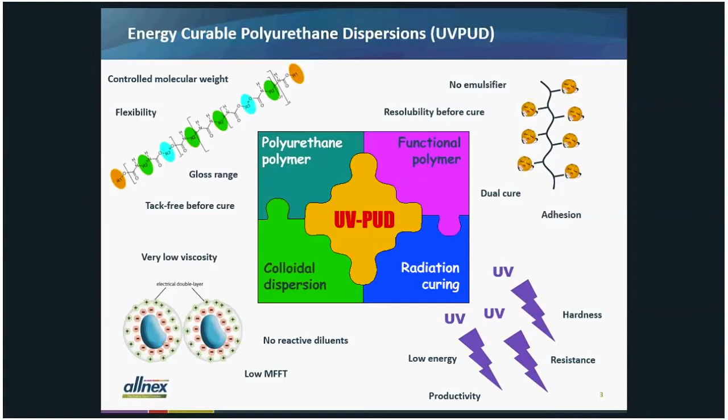And finally, fourth, they are also functionalized polymers that present excellent colloidal stability without the use of any emulsifiers. Their functionality usually stands for good adhesion on wood, but also eventually on plastics, while they can be used for 1K or 2K dual cure if required by the application. Due to their amphiphilic nature, they can be made resoluble in water before cure.

It is possible to integrate these features in a straightforward sustainability model inspired by life cycle analysis. The model has three distinctive axes, as visible on the slide here. For the composition, products can be made from safe or renewable raw materials and typically have a low volatile organic content, as already discussed. In a second perspective, we need to consider the performance in use. The products have a low film formation temperature, and therefore they do not need the use of extra co-solvents, which are often referred to as coalescing agents, in order to make a good film. It is reducing dramatically the volatile organic content of the formulation.

Also, the product can be resoluble in water before cure, meaning that the dried coating can be easily cleaned without the use of solvents. The trend for high solid contents also minimizes the drying energy, and the use of highly reactive products and formulations allows the use of low energy cure, for instance using LED lamps.

The third and last dimension is lifetime and disposal. Most products offer high durability, or even weatherability in the case of outdoor exposure. And an increasing attention is also provided to the recyclable character of the raw materials and the final products, as well as their biodegradability. That brings us to the front end of innovation.

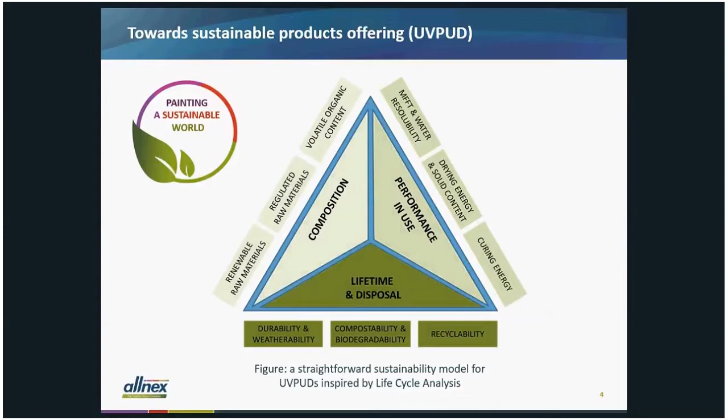Indeed, and all this leads to an interesting portfolio of products for different applications. So I'm looking to the middle of the slide. Different applications, different cycles, different coats, primers, top coats, but also self-sealing systems. Also different levels of performance. Can be high performance, but can also be value in use, like we say, fit for use, meaning that products do the job without over-engineering.

Can also be clear applications, white, colored. We know that for colored systems you need a much higher hardness. Can be indoor as well as outdoor. Most of the products will be oriented to industrial applications, but we also have some specific developments and products for what we call field applied applications. And then last but not least, gloss is very important. So we have specific developments and products for high gloss applications as well as for matte.

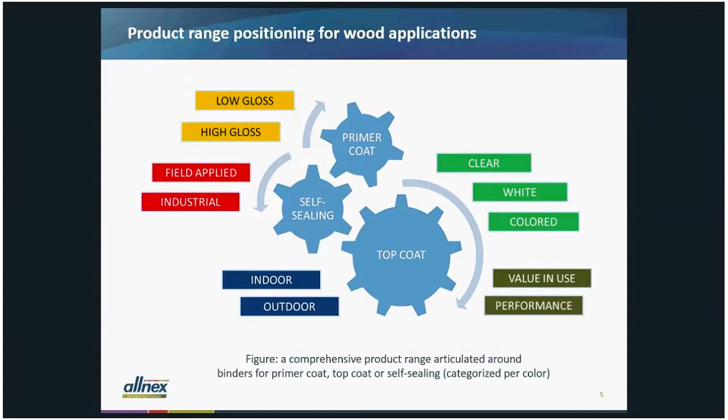Okay, and 4 new products were recently developed for these wood applications. When you look at the slide, you can see that they are each characterized by an innovative step, which is always linked to the particle: its morphology, its stabilization, its functionalization, or its composition. We are entering here in a fascinating world, the world of nanoscale particles.

When you imagine monomodal particle dispersion at 40% solid content, which is often the case, you have to realize that the distance between the particles is only about 20% of their diameter. Yes, they are really so close to each other, and at the same time, they are stable, even in more extreme conditions of storage. It's indeed very, very surprising.

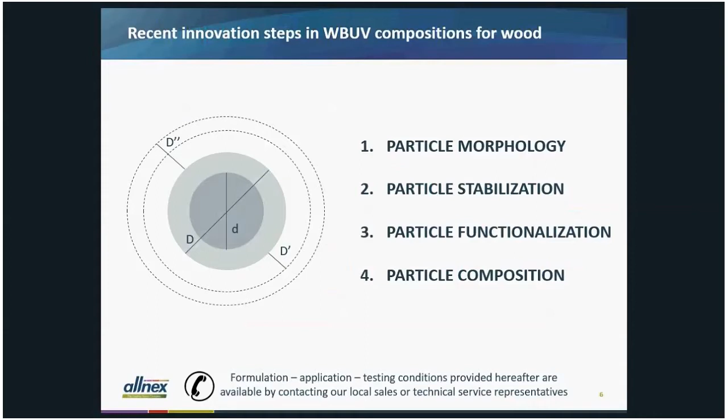And did you know that 1 gram of particles having all a diameter of 100 nanometers, which is a standard for these kinds of products, well, this 1 gram will develop a surface of about 100 square meters. The nanoworld is really full of surprises. So let's go immediately to our new products now.

First, we are going to look at the particle morphology, introducing swollen polyurethanes. Products with hard-coat properties after cure were developed as small molecules with a very high acrylate functional density, and since they were viscous liquids, they found their existence in water as an emulsion. That is the situation that you see on the left of the slide here.

These products can have a very high solid content, up to 65%, associated to a big droplet size, up to 1 micron. But we were able to develop recently a new dispersion, keeping the same features. The product is made from highly functional acrylate polyurethane particles, having thus a higher molecular weight, as you can see on the slide, but that could be swollen by the compounds of the previous emulsion. And that is the situation that you see on the right side of the slide.

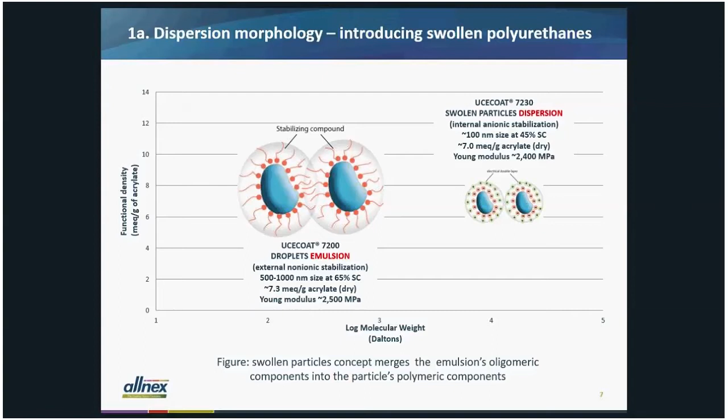The particles can thus be seen as a kind of reservoir for highly functional molecules, but the new products keep all the attributes of a polymer dispersion in water. So, what does the product look like? Well, when we first look to the wet dispersion properties on the left, we see that UCECOAT 7230 has a high solid content of 45%. High because the standard in waterborne UV is 35 to 40% in solids. The pH is above 7, which is also standard, of course.

The MFT, so the minimum film formation temperature, is below 5, which is very low, which is important as it does not require addition of co-solvents, so no extra impact on VOC. And UCECOAT 7230 is also tin-free, like all our new developments already since a couple of years.

Now, coming to the coating properties on the right side, all the value of UCECOAT 7230 is related to its extremely high concentration of acrylate functions, making this resin very effective as a modifier resin for improving hardness, scratch resistance, and stain resistance.

So, it's a bit similar to 100% UV formulation, where, for instance, a 6-functional urethane acrylate is commonly used to improve the final properties. Here, in waterborne UV, we recommend UCECOAT 7230 as a performance booster in the same way.

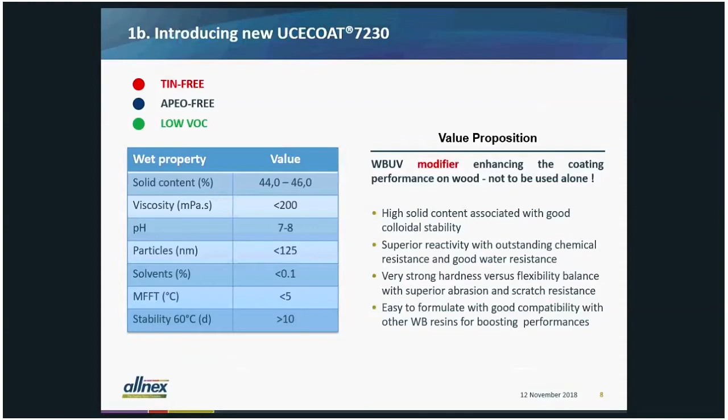On the next slide, we have an example, and it's a very extreme example, since here we blended UCECOAT 7230 with Resydrol 6191, a conventional alkyd emulsion that does not contain any reactive acrylate functions on itself. So all the UV cross-linking is coming from the 7230.

And it's an interesting example since it also shows a way to introduce renewable content in waterborne UV dispersions. So in this case, here it's a 60-40 blend. We obtain a renewable content of nearly 20%.

And on the left, you see the profiles. The yellow spots on the graph indicate which properties remain unaffected by the blending. You see the stability, the aspect, the gloss, the chemical resistance. And of course, there is also some impact on hardness and stain resistance. But this is very decent considering that we blend here with 40% of an alkyd emulsion. So all this would not be possible without the extremely high double bond concentration of the 7230.

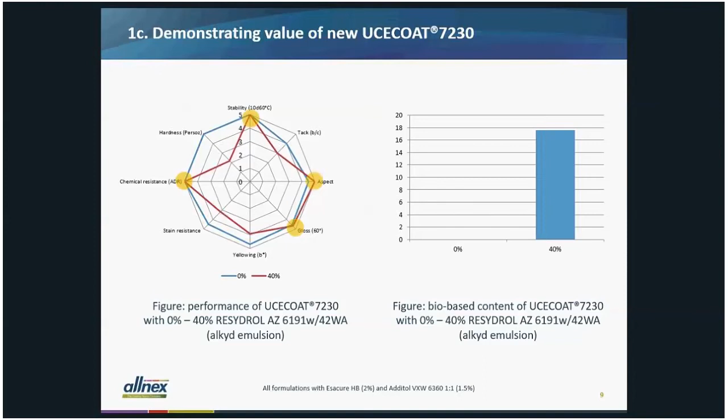And now we are going to look at the particle stabilization this time, introducing nonionic polyurethanes. The stability of polymer dispersion is usually obtained from the electrostatic repulsion between negatively charged particles.

Sure. On the wet properties first, there are two special characteristics to mention. First, it's a label-free dispersion. And second, and this can be associated to the non-ionic stabilization as explained by Michel, the resin shows a very good pH stability during aging. And therefore we expect for the UCECOAT 7738 a lot of robustness and stability in the formulation.

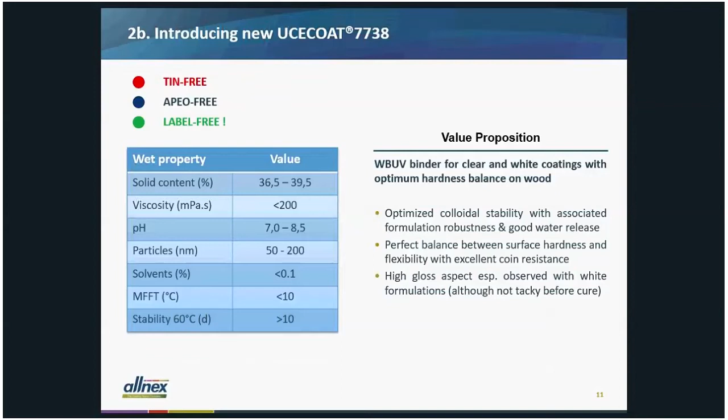And with physically drying resins, we know that it's much more difficult to obtain this mirror effect. But of course, it's a big advantage to be physically drying because it means less dust take-up, so less risk for defects in your high gloss coating.

An interesting note is also that both dispersions can be blended in high gloss applications. We got quite interesting results with an 80-20 blend. So 80 for 7738, 20 for 7788.

Okay, and now we are going to look at the particle composition and introduce functional polyurethanes. Please have a look at the left of the slide. In fact, yellowing on cure, whether with UV light or electron beam, may occur during product application and typically disappears after a few hours. It can, however, cause some difficulties for online color matching in specific industrial lines.

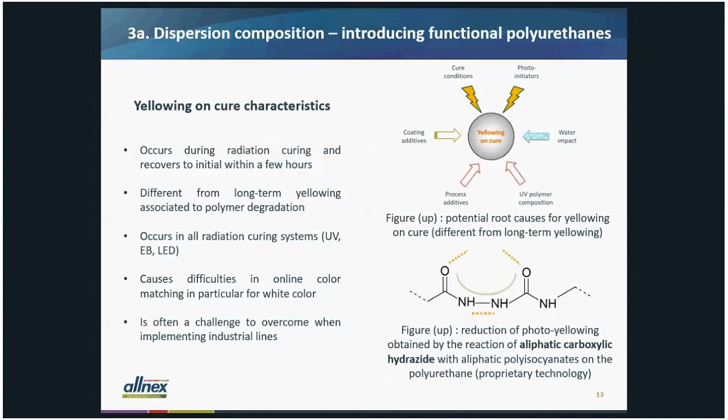Well, in practice, we confirmed the lower yellowing upon cure of the 7510. It can be a real advantage in those applications and productions where the color matching is done immediately.

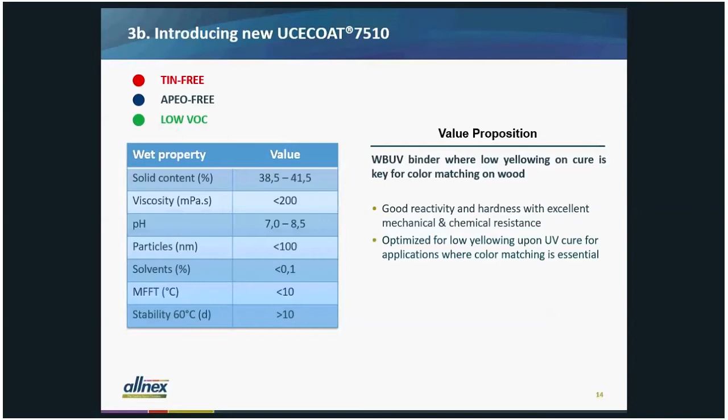But in general, we can position this 7510 also as a fit for use resin, similar to the 7788, but with a higher hardness. And we see more of that on the next slide. So there you see the two profiles. The 7788 we know very well. It's a standard in our range. It's more flexible. It's tough. While the 7510 is clearly more hard and has these aspects of less yellowing upon cure.

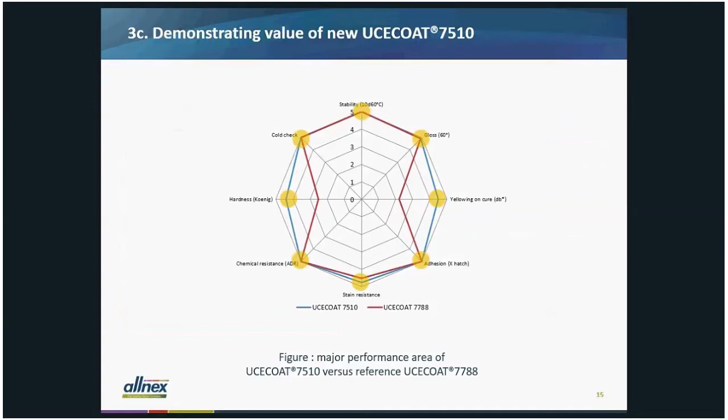Okay, and finally we are going to speak about particle composition again, but introducing modified polyurethanes. Like you can see in the slide here, the synthesis process of UVPUD implies the reaction of different constituents in the presence of polymerization aids like catalysts or radical inhibitors.

And a typical polyurethane structure is essentially composed from, on one side, the polyisocyanates, on the other side, the mandatory acrylated polyols, but also typically some long-chain polyols and other functional polyols, typically the dimethylolpropionic acid, which is providing, after its neutralization, the anionic functionality required to provide a stable polyurethane dispersion in water.

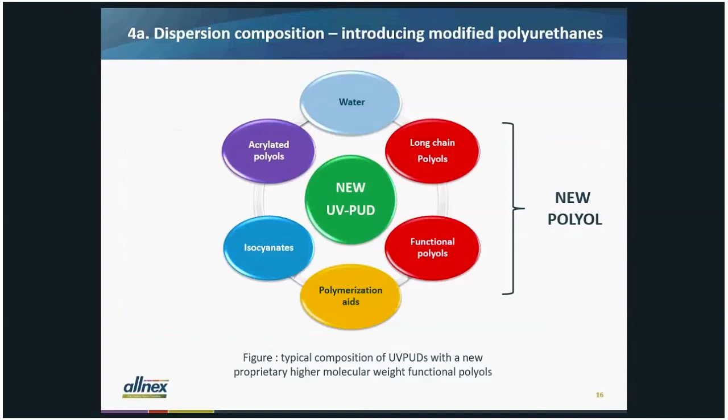We developed here a proprietary composition that merges the long-chain polyol with the functional diol, bringing thus a functional long-chain diol instead. So let's look now what it brings in terms of product benefits. The number one benefit is related to cost effectiveness. The number two benefit is that this binder is highly compatible with a lot of dispersions, waterborne UV or conventional. This offers a lot of possibilities to formulate and balance cost performance.

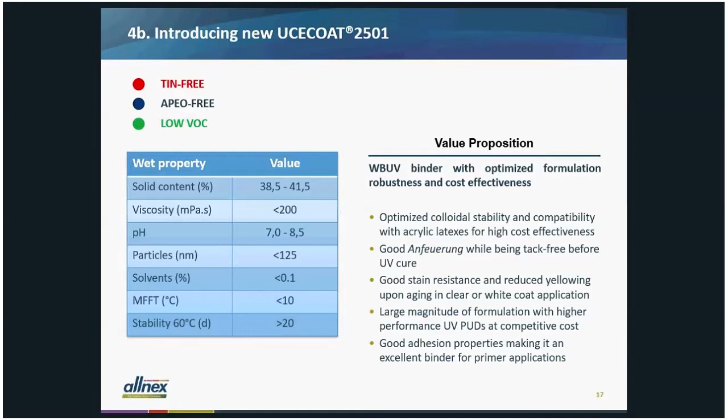And the number three benefit is that UCECOAT 2501 is a binder with very good adhesion properties. So for this reason, our first recommendation is to evaluate the UCECOAT 2501 for primer applications, alone or in combination with other dispersions. For top coat applications, on the next slide, UCECOAT 2501 can be a good blending partner, especially in combination with hard and reactive dispersions, in order to balance the reactivity of the systems. For instance, to fine-tune the drying or to improve adhesion properties.

Okay, it is now time to come to some conclusions of this presentation. I hope that we could convince you that allnex is offering a comprehensive range of waterborne products for wood application and covering large market needs. We showed also that we did extend our product offering with 4 new products in our portfolio, supported by clear innovation and technological differentiation. And finally, we highlighted the strong sustainable position of the technology and the wish of our company to be a driver for green and environmental friendly coatings.